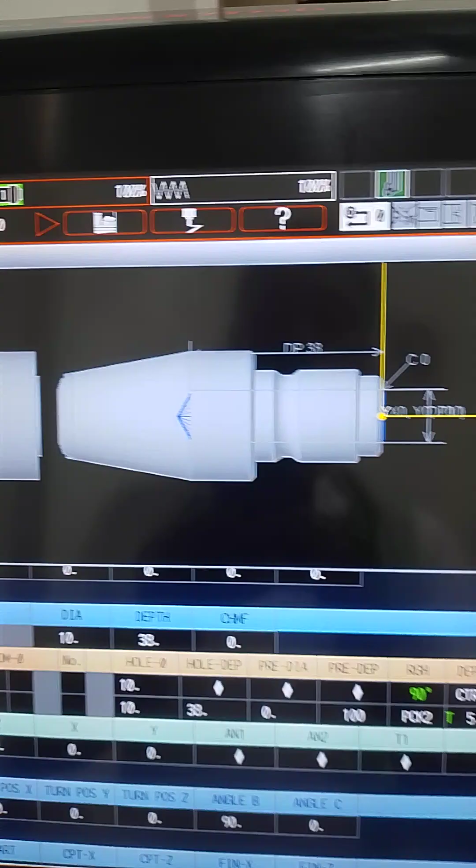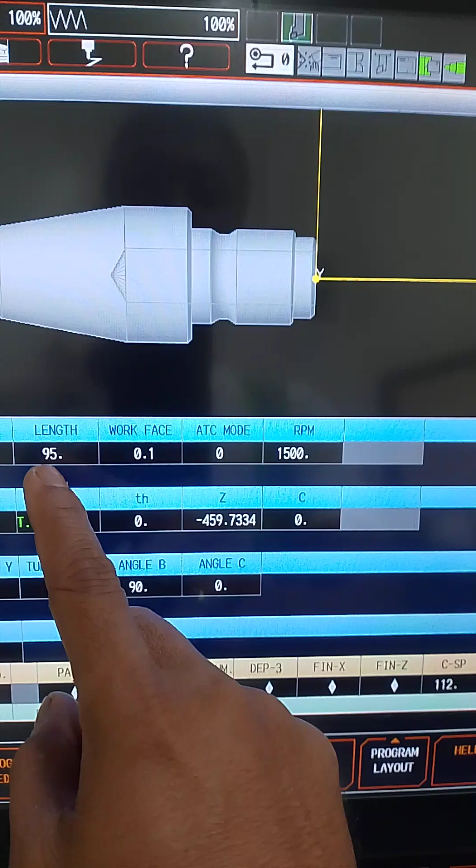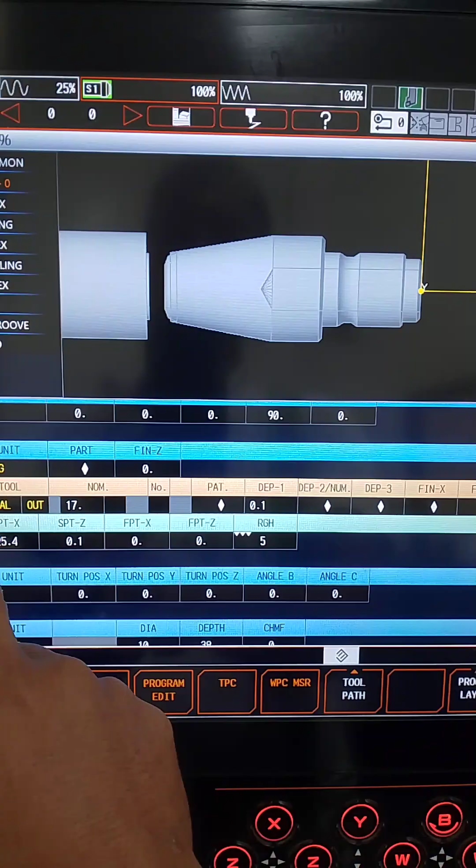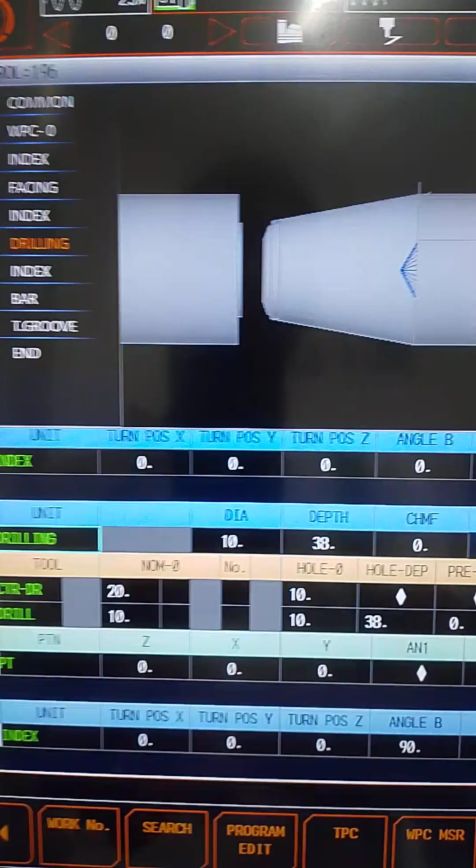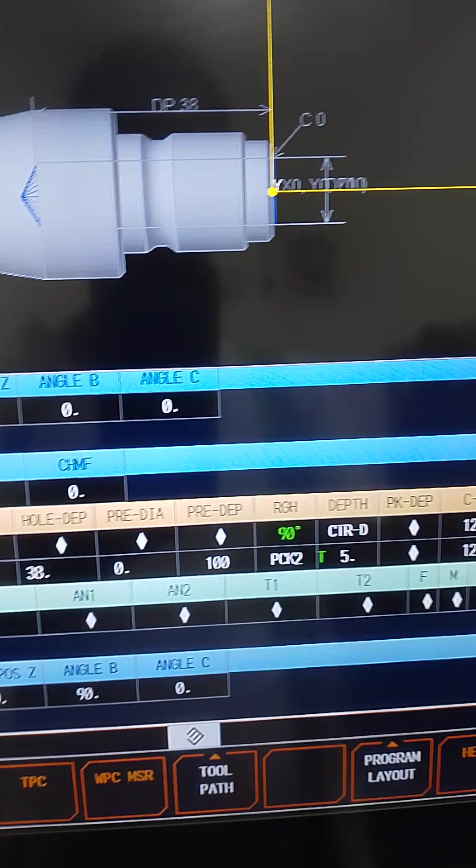And the second process is drilling. Drilling is 10 mm diameter, 38 mm depth. So sequence number 1 is center drill. Center drill. Then the drill, 10 mm diameter, 38 hole depth. So pecking, that is the pecking cycle. Then this cutting speed and feed rate is auto set by machine.

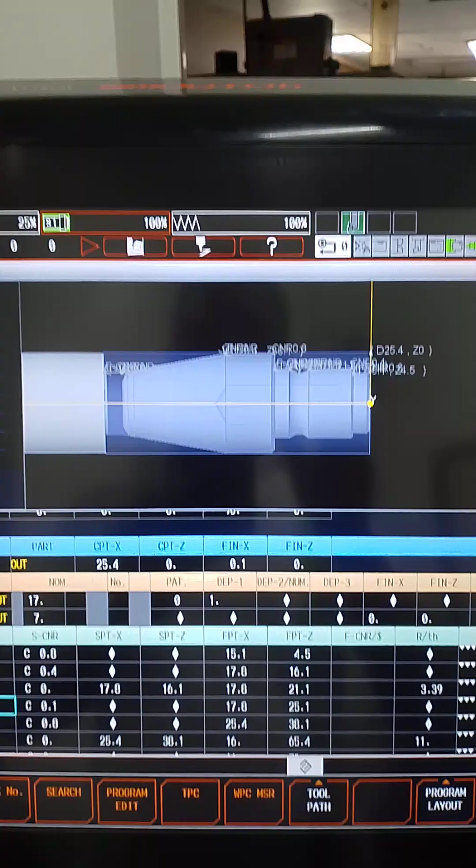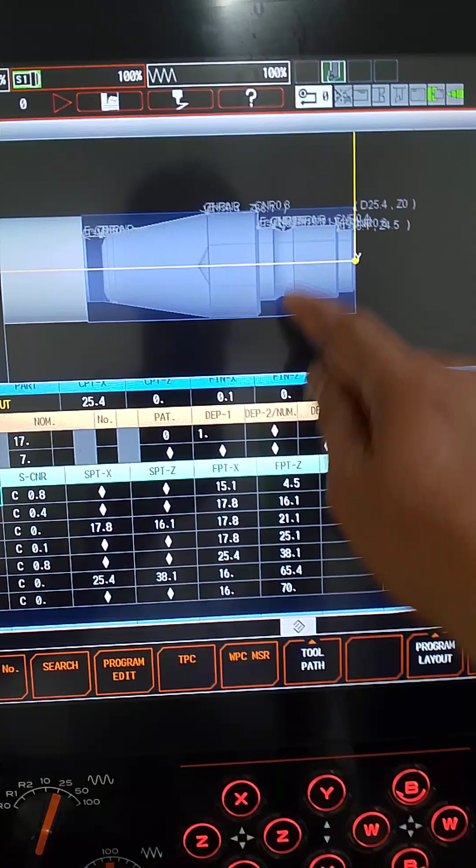So this is the program. 15 mm here, up to 17, then concave, back to 17, then until it tapered here. And the next is groove for cutting. So that is the process of the nozzle.

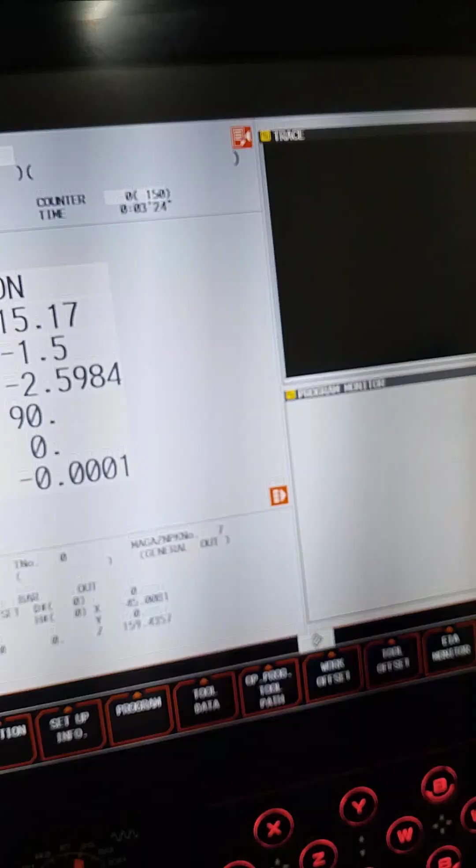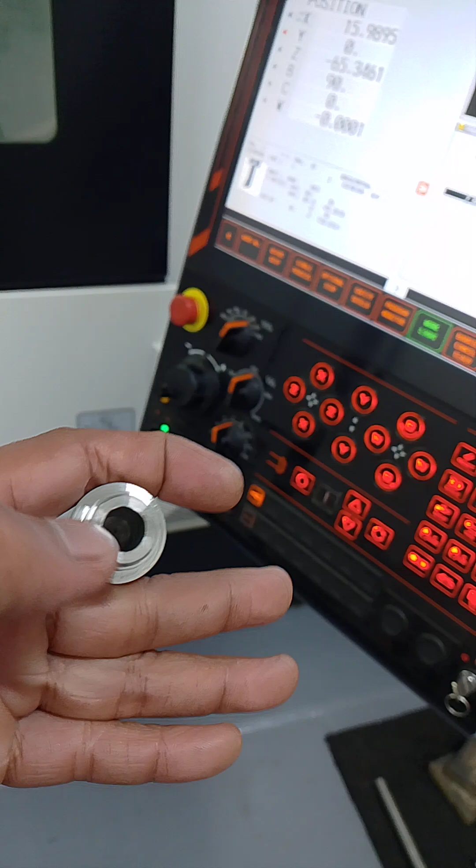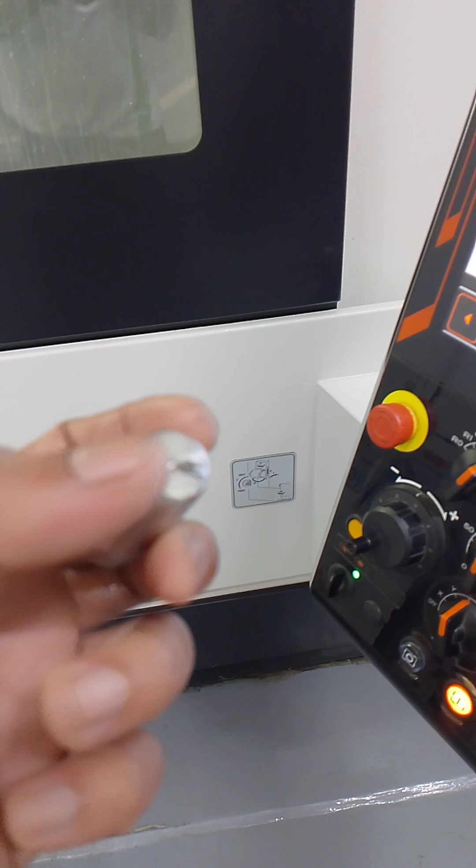So I have some finished items here. This is the finished item, but only the hole here. This is a hole of 10 mm. The other side is, after the sequence, we can make a hole here in the front, 2 mm diameter. So I can let you see the drawing.

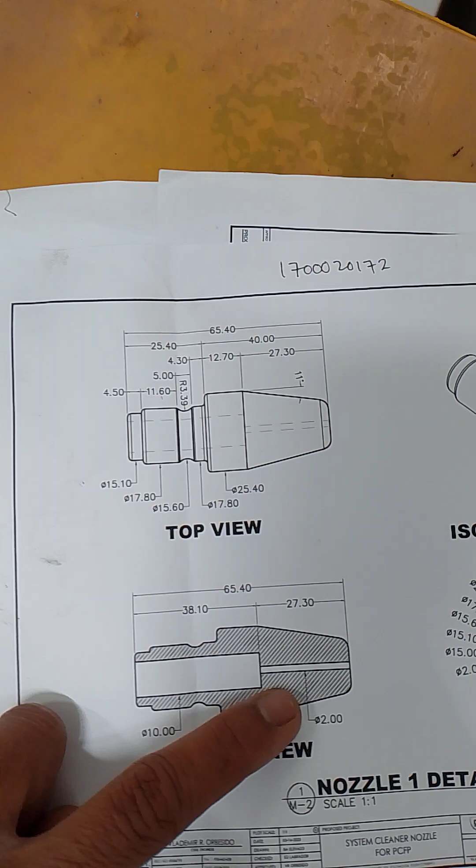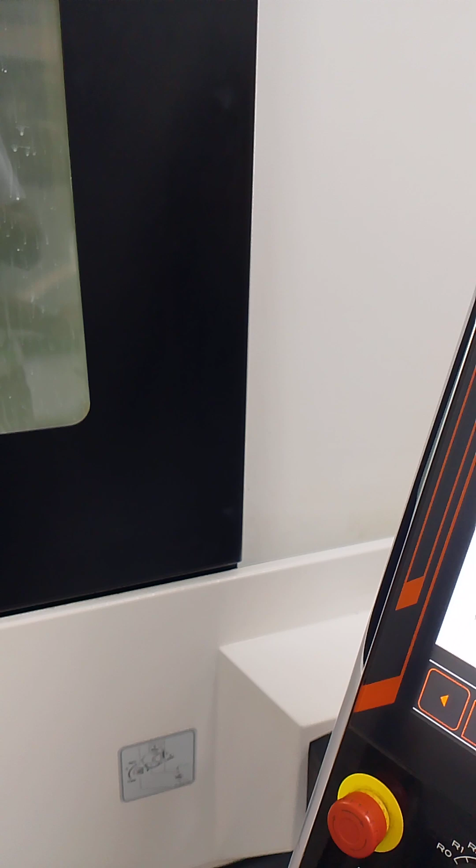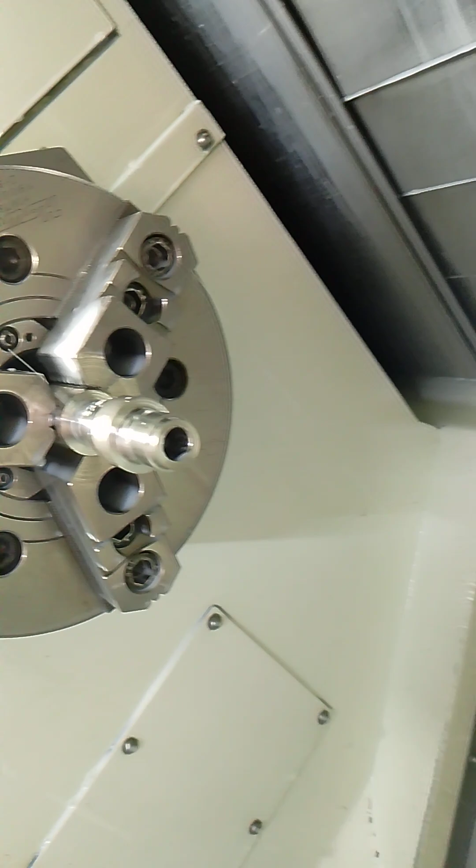This is the cutter, tools for grooving and cutting, so that we have to use